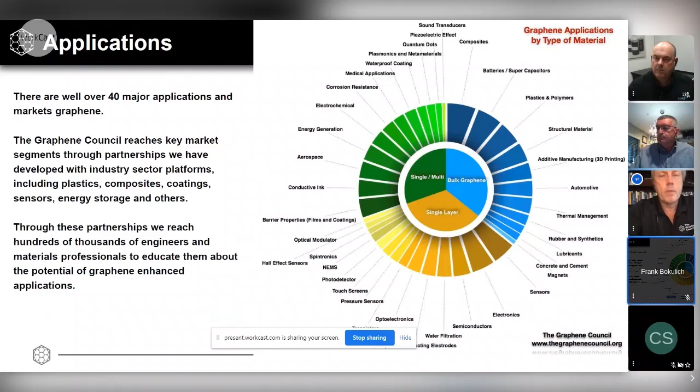Graphene, as I mentioned, was isolated first in 2004. The Nobel Prize was granted in 2010. And since then, it has kicked off a flurry of research and patent filings, of which there were more than 2,000 in just the past year. Where we find ourselves in 2020 is that graphene production has reached the ton scale, which is enormous for a nanoscale material. And we now see it being used in automotive applications, and most notably, the Ford Motor Company has graphene-enabled parts in their production vehicles. And the next slide, please.

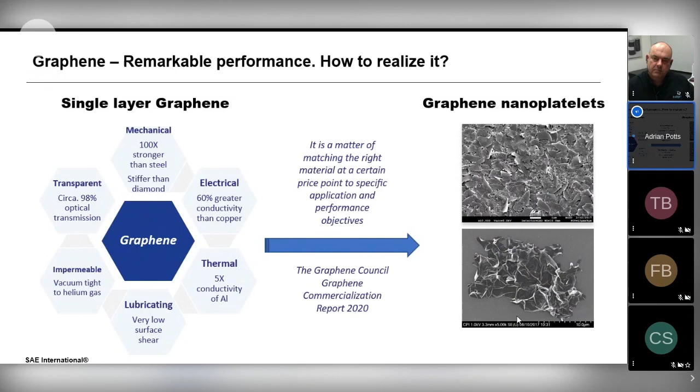So correct material for application, the value stream opportunity, understanding that is so important, the potential performance objectives, and really how to get from what is quite a challenging material to use into a usable form. So the strap line at the top of this slide: if you can basically get graphene into a material correctly, then you can make great use of the material advantages. The keys to that really are twofold in our view.

A clear understanding of the application technology and the end use that is so much geared around a clear understanding from the end user about what they want to achieve, rather than just a look-see about what graphene might do. So clear understanding of objectives and end use goals, and then how that material might integrate into their system. And then we're great proponents of the how-to,

backing up what we do with large amounts of test data, and also clear understanding of how to disperse materials well into appropriate materials, how to do that to create stable dispersions, how to add materials correctly, how to make sure that we have the correct chemistry for the end use application, the correct carrier for this nano powder, and ultimately the correct loading of material into the end use application.

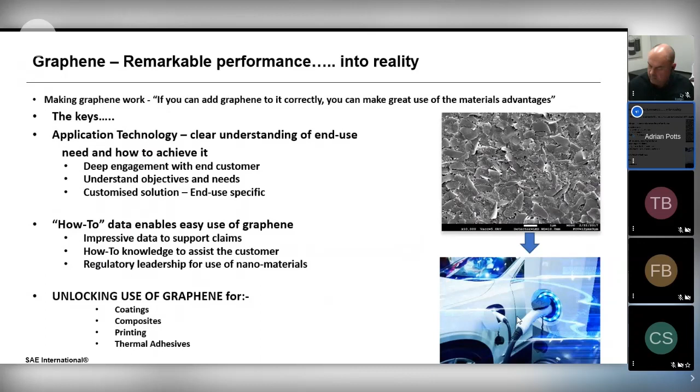So our sweet spot that we have been operating in, that we'll talk to a little more today, is in the area of coatings, composites, printing, and thermal adhesives. So 3 areas for us just to cover in this briefing: graphene in composites, graphene in thermal applications, and then latterly in coating. So first to composites, and really just to look at the current status from our side of

graphene in that application. So basically what we're doing here is taking graphene nanoplatelets, we're adding those to appropriate dispersions that are compatible to the end use. In this case, on this slide, what we're doing is taking graphene, dispersing it into epoxy carriers to enable them to be integrated into what we call carbon fiber prepreg materials. So these are high value, high performance, continuous fiber materials, such as are used typically in motorsport and in high-end

automotive applications. Earlier demonstrators for that are clearly body parts and lightweight structures that can incorporate both carbon fiber and graphene. So early wins for us in this type of application. We're clearly in the area of improved mechanical performance for composite materials. So enhanced fracture toughness, as well as maintaining things like surface finish.

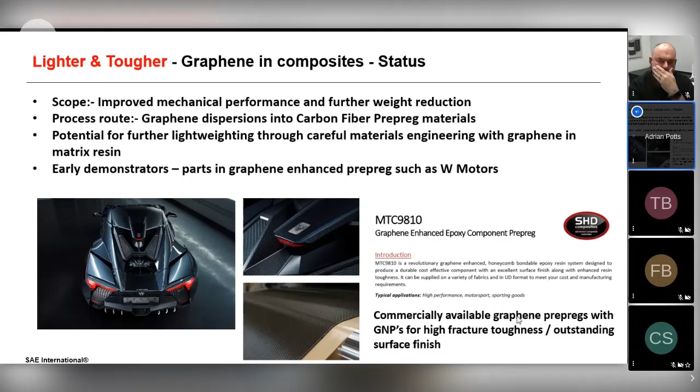So you see here a demonstrator part that we produced a number of years ago in tandem with W Motors as a demonstrator for manufacturability of graphene in prepreg. This material's commercially available in a prepreg form, typically produced by a company called SHD Composites in the UK and the US. So commercially available material for enhanced fracture toughness and things like outstanding surface finish. So high performance materials in prepreg form.

Secondly, another area of application for composites where we've really done well is with one of our customers, Infinite Composites Technologies, here in the United States. And I put this up really to demonstrate the outstanding performance advantage that graphene can bring to these types of structures. So in this case, cryogenic vessels, it happens to be for space applications. The key message here, though, really is that with a graphene addition, compared to standard material, we're able to pretty much eliminate microfracturing of the resin material in extreme cryogenic testing.

The read across to that is clearly evident. So why pick this example? Space applications have the potential to read across into more mainstream automotive applications for areas like pressure vessels, for areas like hydrogen-powered vehicles. And again, it's all about the correct format of material dispersed in the correct carrier material to enable the enhanced performance of the finished product.

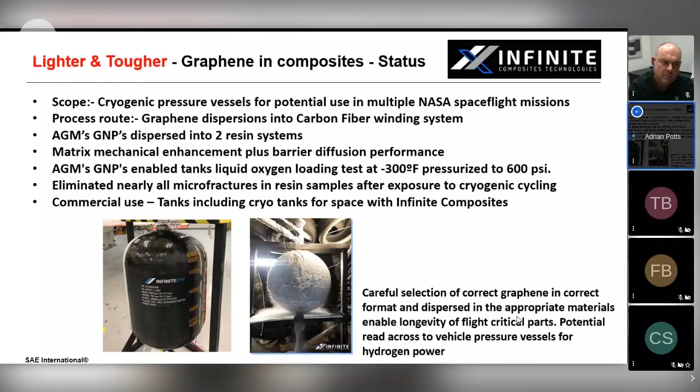Thirdly, just to note, we're currently engaged with a tier one automotive supplier here in the United States, materials for high volume manufacturing of composite parts. The same message really is true. Put graphene into the appropriate materials, and you can really enhance the performance of the composite structures that you're trying to make. So comment here from the customer, really about direction of travel more than anything else.

So we see positive directional improvements in the key mechanical performance of their composite systems that they're interested in. And encouragingly, no negatives either. So other mechanicals didn't show a significant decrease in performance.

So areas of improvement: significant improvements in tensile strength and modulus, in flexural strength and modulus, and most importantly, in impact performance with those materials.

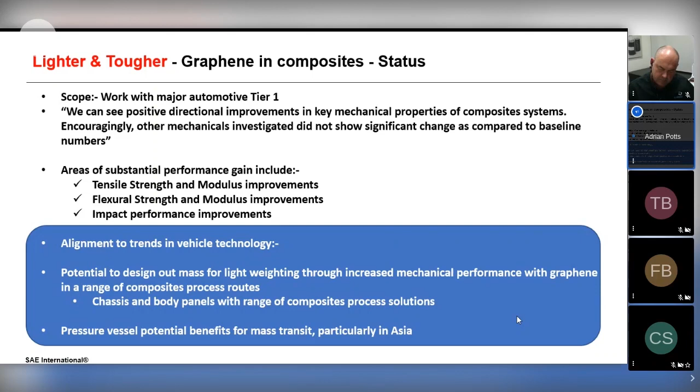So when we look at alignment to trends in vehicle technology, clearly there's a great opportunity, we feel, for improvements in mechanical performance, particularly as related to enhancements in resin systems. That clearly reads across into chassis and body panels made from composite materials technology. And then specialty areas like pressure vessels, for mass transit, and with a particular eye to the Asian market.

Just to touch on other technology, we do have a printing technology where we are able to take graphene and print that, in our experience, into composite materials. But we believe that there is some great read-across potential into other areas as well. If you can print graphene into composites and achieve great mechanical performance additions, currently we're doing this printing dots of material, but there's a clear opportunity to be able to print continuous tracks.

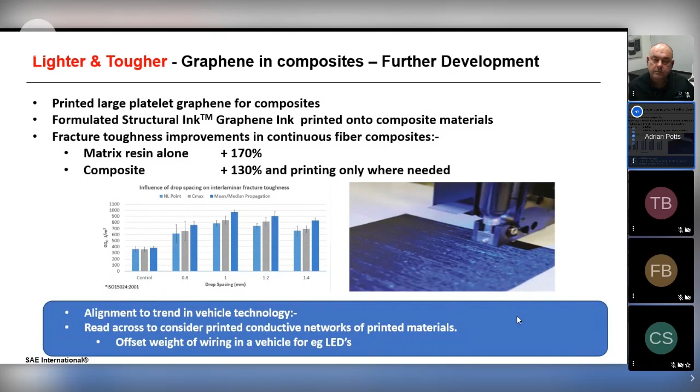So the read-across into vehicle opportunities is potentially around continuous tracks of conductive graphene material, potentially to be able to save weight around areas like wiring for potential applications like LED lighting in vehicle technology. So graphene, great potential in this arena for composite and related applications.

Secondly, in thermal applications, here we have again been developing our platform in aerospace materials, looking at high conductivity and low density additives for composite materials into this application. Currently, we have products in the market commercially available that are 2-pack thermal adhesives, around 6 watts per meter K performance, but the advantage for aerospace is very low density, which again has the potential to read across into other applications. Good adhesive performance and things like low outgassing as well.

So looking ahead into automotive, our question really is, could graphene figure in the automotive space for things like thermal interface materials, the need in respect to particularly battery technology, technical solutions needed, as well as a volume anticipation for the growth of EVs and the growth of thermal interface materials.

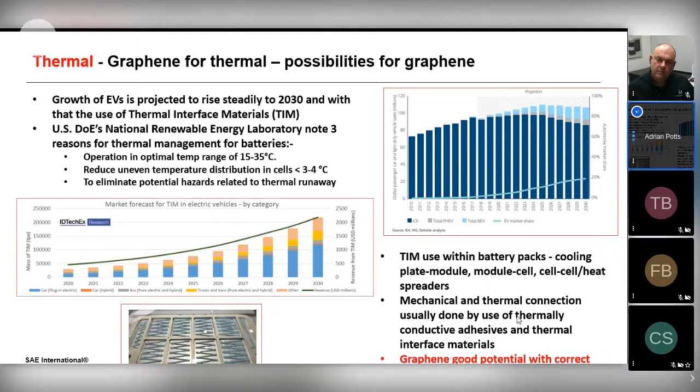As you see on this chart, top right, EV projected growth, and there are plenty of projections for EVs, and then middle left, the forecast growth from the IDTechEx group for thermal interface materials in electric vehicles. NREL put out their guidance on the need for control of battery temperature, which we see there top left, and clearly there's an opportunity for graphene to be used well in those types of application, again with the correct dispersion and the correct particle formatting.

If we look at the current market and range of materials performance for those types of applications, we sit sort of in the middle of current thermal paste adhesive product offerings, so at around 6 watts per meter K. Typical products out there are around 0.5 to 12. We believe there's great performance advantages to be gained in materials engineering and materials engineered solutions.

So things that we're looking at currently: controlled alignment of graphene to create planar structures with that material to enhance thermal conductivity further, as we see in the middle of the top right diagram, and then segregated networks or domains of materials, whereby we can segregate areas of graphene for higher thermal conductivity. And then also engineering to produce hybrids, combining with other materials to enhance the performance yet further.

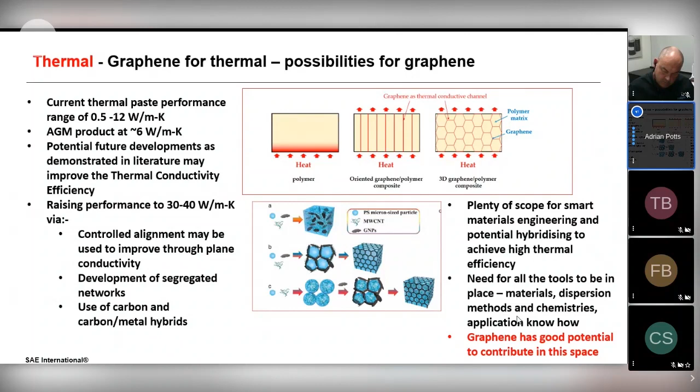So we see a great need, but we see a great opportunity also for graphene in this space to be able to contribute through materials engineering to create some great solutions for thermal performance with graphene nanoplatelets.

And then our third area, just as a brief overview, is in the area of coatings. At AGM, we believe we've done all the hard miles in this area in terms of graphene application and graphene dispersions that are now pretty much optimized for paints and coatings. Our area of excellence is principally in primer applications, in both solvent and water-based systems.

Graphene works incredibly well when formatted in the correct way for anti-corrosion, for barrier applications, for chemical resistance, for paints and coatings. I mentioned primer is our key area of activity, but when we look at tie coats and top coats also, clearly the materials can be integrated into those systems as well.

I mentioned solvent-borne and waterborne coatings and a range of different chemistries. Typical of what you might expect from a graphene addition to a paint and coating system is seen here in the middle image, the visual image of highly effective corrosion performance for an automotive primer. This is a commercially available automotive primer with a 0.1% solids addition of graphene to that material.

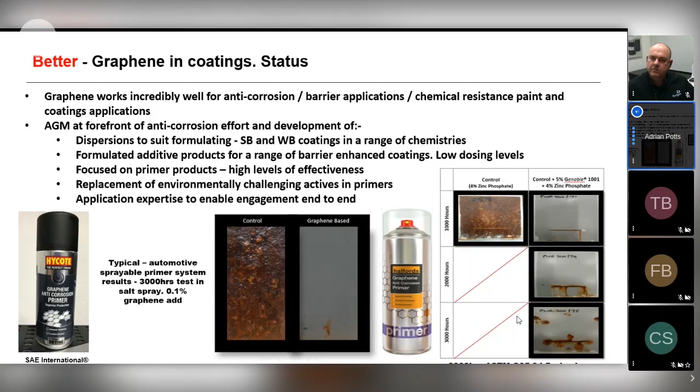Commercial products are available in aerosolized form and for spray shop applications, and then other areas for anti-corrosion performance in more elaborate systems where we're able to take the active out, so zinc and other actives, chromates and so on, to create more environmentally friendly corrosion performance products.

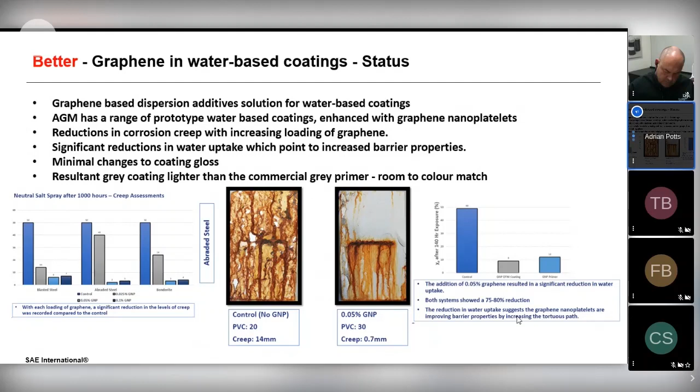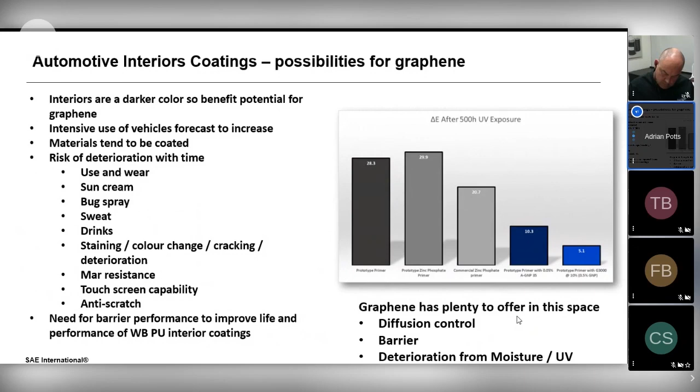And we're also able to manage color with very low graphene additions. So for things like direct-to-metal coatings, there's a great opportunity there. Lastly, really in this area, looking at automotive interiors, we see great potential utilizing the barrier performance of graphene in this area. Interiors tend to be a darker color, but we can utilize the barrier performance to really look at balancing chemical resistance and UV degradation. So graphene has plenty to offer in this space in terms of diffusion control, barrier, and deterioration from moisture and UV.

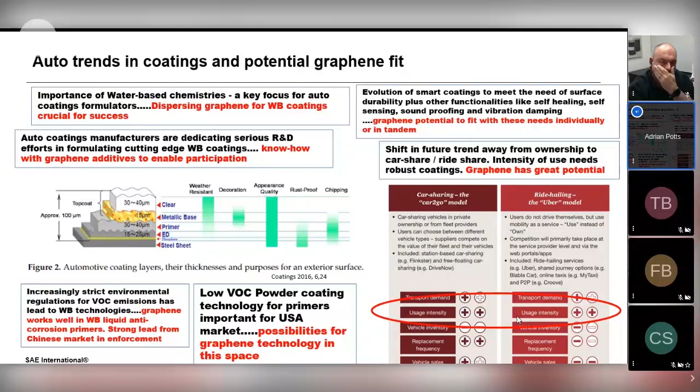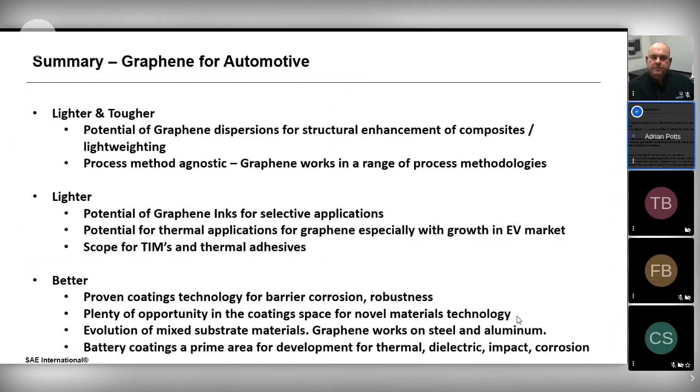So in summary, in answer to the question, lighter and tougher and better and stronger, we see great potential for graphene in the area of composites. We're now at a point where process method is pretty much agnostic, so graphene working in a range of different process methodologies. Potential in specialty applications for thermal, and some great performance advantages in coatings applications as well.

So with that, I'd just like to say thanks for listening. A very brief tour to what we're doing and some of the exciting opportunities where we feel graphene has some great traction. It's all about application technology, as I mentioned before, know-how, and providing material solutions that work. So thanks for listening, and I'll hand you back to Terence.

Thank you, Adrian. Really appreciate that. And I think your presentation demonstrates the flexibility and range of performance that graphene can bring. And now we're going to hear from Mark Thompson from Talga Resources, who's going to focus in on another application area that has tremendous promise, and that's in energy storage. Obvious application for the automotive sector. We saw from Adrian that the thermal management properties of graphene can help, especially for EVs and light weighting, which is also important in that sector. And now we're going to hear about the energy storage devices themselves and batteries. So, Mark, we'd love to hear from you about that.

And as you're teeing up your slides here, we'll just wait till they get to the full presentation mode. Yep, no worries. Thank you. And we appreciate you joining all the way from the other side of the planet. Oh, no worries. The wonders of modern technology will never cease. But awesome. No, pleasure to be here.

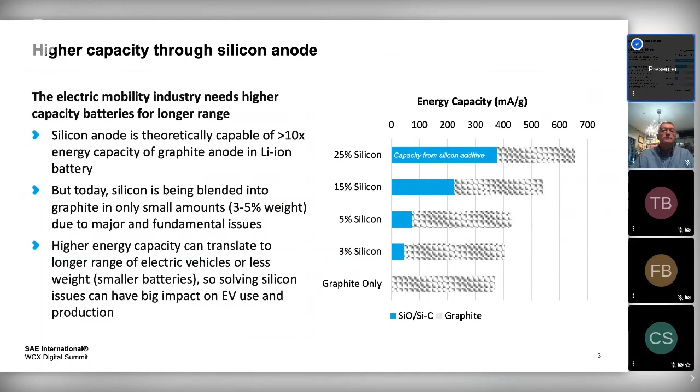So what's the problem? The problem is on many different fundamental issues. Silicon, when you put an electric charge into it, holds more lithium ions, but that also means it changes the volume by 300%. If you've got a battery in a steel case, that's still going to cause a problem. If you've got a battery in a pouch cell, or you're trying to engineer a battery pack for a vehicle, that swelling, that volume change, is a killer in the physical application, but it's also a killer internally. It leads to the very rapid death of the battery.

What happens is the silicon particles themselves will pulverize and break under that volume change, and they won't go back together. The entire particle system will try to lift off of the copper current collector. More importantly, when the particle breaks, they increase their surface area, and that extra surface area means more lithium gets sucked out of your electrolyte and cathode to form the solid electrolyte interphase, which coats the particles the instant you charge a battery for the first time. Once that lithium is gone from the system and stuck in a solid interface on the anode particles, you can't get it back. So you just lost, say, 10 to 20% of your battery capacity, which means you just lost 10 to 20% of your range in your electric vehicle, approximately.

So this is the problem with silicon. These are profound problems if you want to get better performing anodes in the short term.

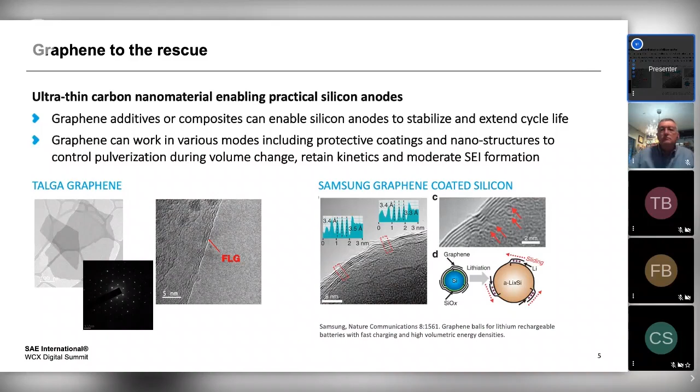This is a relatively recent development. We've got a picture here of Samsung's version of it, but there are many others. On this page, I'll show you one of our products we've developed, called Talnode-Si, which is our registered trademark for this graphene silicon composite. So what you have now is a highly engineered porous graphene silicon composite. It's nanoscale particles now agglomerated and put together in a special way.

We do it using mechanical methods, not trying to crystallize things from gases. As someone was talking about earlier regarding Ford using composites, if you walk into Ford, they'll tell you about the limit for how much per pound of material they're willing to pay. We have to be very aware of the economics and make sure these particles can fit into what would be a standard industrial framework. So we use off-the-shelf equipment, and the technology we focus on is always filtered through the economic cost. These particles now have Coulombic efficiencies of nearly 100% and very high first cycle efficiencies.

Today, graphite with no silicon gives about 350-360 milliamp hours per gram capacity. As you sequentially add more silicon, by the time you add 80% of our combined graphene silicon product, you have nearly 3 times the capacity, which would enable much longer range of the vehicle, or you could design a smaller battery since it's got more energy capacity. That saves weight, which has massive impacts on the braking and other components of the system.

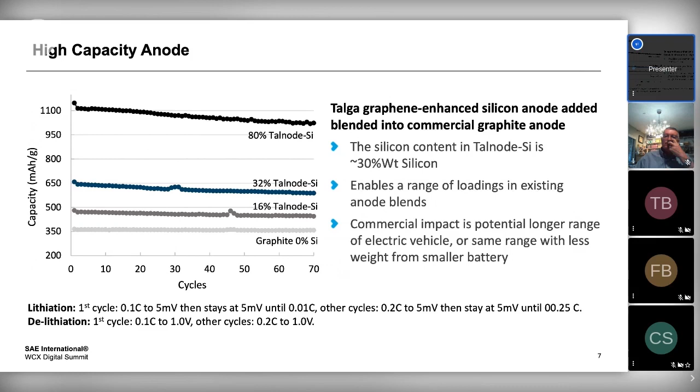So that was it—trying to be short and sweet on a relatively little known use of graphene deep in the heart of batteries. Even today, silicon is getting used more and more in anodes, but it's topping out at about 3 to 5% because of these problems. We see graphene as a fantastic way of getting the amounts of silicon up, giving consumers not only better performing products, but more sustainable products. The interface between the consumer and the graphene producer, in this case, could well be yourselves. So at that point, I'll leave it there and look forward to any questions.

Excellent, Mark, thank you so much for that—absolutely fascinating. Increasing energy density, especially for EVs, and keeping the weight under management is the holy grail for the next phase of transportation, not just for passenger vehicles but also for freight. Going back to Adrian's presentation, particularly coatings—which I know Talga is also working on—if you think about anti-corrosion resistance, or the shipping industry, with 80% of the world's global trade by weight moving by ship, that's another interesting area where graphene has an application, with anti-biofouling making ships more efficient and reducing their fuel costs, which is their biggest cost factor.